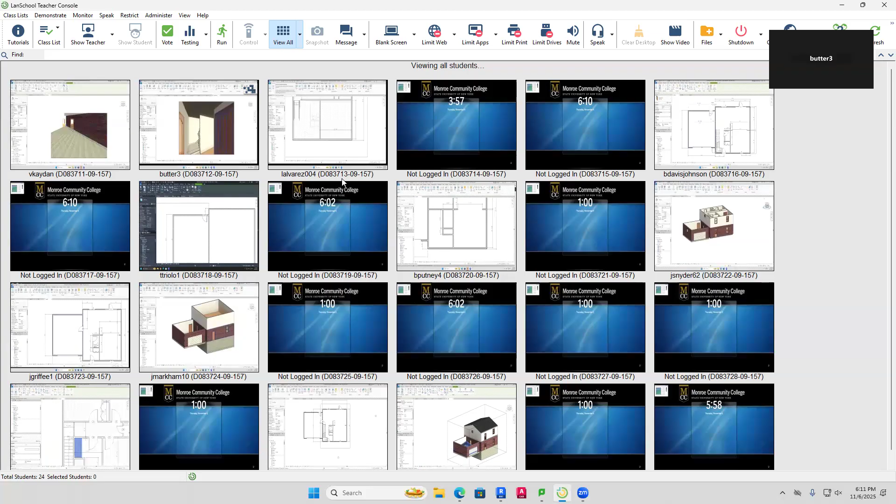As you're going through here, I don't just want you to fortunately follow along blindly—I want you to understand the process of where we're going with this. So I'm going to take over your screens, be as brief as I can, but explain a few concepts. Just hang on a second, let me lower the lights and show you a few things, then we can move on.

Taking over—can you guys see my screen now? This right here is the final 3D model. This is where we left off last week, and taking a look at this, we now have a number of things in place.

We covered how to do the basement walls last week, so you should have those all in place. Now you'll notice underneath here I put in my interior walls, but one thing I don't have is this information right here.

If you take a look at it, that's the wall foundation bearing footing. That is what would go underneath when it's excavated, as I showed you in the pictures earlier—you always have to have something down at the bottom here. That's the excavation footing.

Now, to get this, you go to Structure, then go to Wall. This is the only time we're going to use the Structure tab, so I'm going to go here—and let me turn this on real quickly so you guys can see a little better.

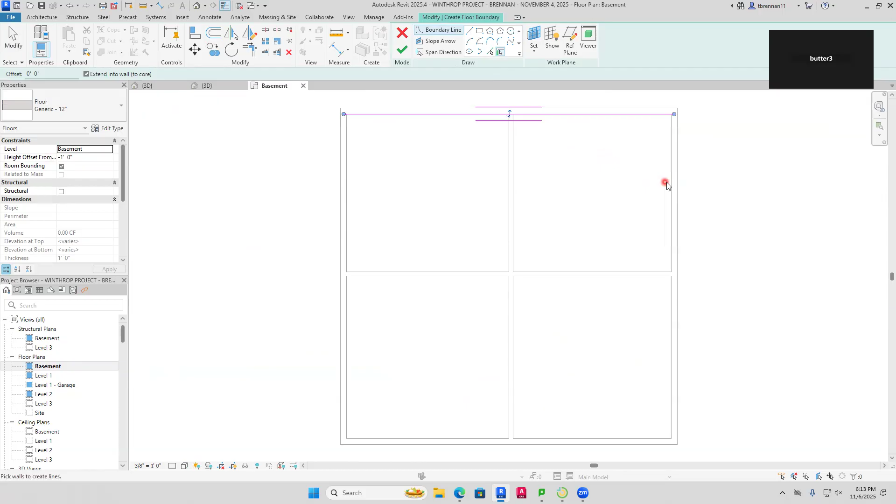And then at that point, what I could do is use my wall lines here. So I can just click on the interior of the wall lines here, and as I do that, it's going to give me this information. I hit the green check mark, and now I have that in place.

So if I go ahead and take a look at this again in 3D, I now have this. So that's there. And that actually needs to be brought up a little bit - yeah, there's a problem in this where this got saved with -1 foot. It should be 0, and we're good to go there.

Okay, so we have that. And you're going to see a little bit of a seam here. That's okay, and that is how that looks. So that is what you want to do for the basement.

Now, the basement plan, the rest of it has these right in here. And then the other thing I didn't do yet is I didn't bring my stairs down into the basement, so let me review again how we do that.

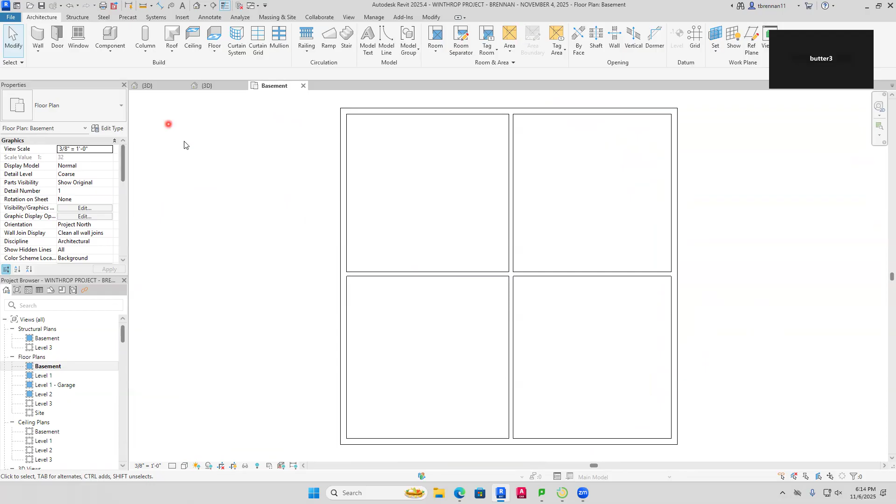So over here, I'm going to go back to my 3D view here. And what I want to do is I've already got my stairs going from the first floor to the second floor, they're right there, but I need to actually have them go from the basement all the way up. So I'm going to go to level 1 right here, and level 1 is right here.

And then remember, if you're going to put in your stairs, you always have to use a section. Now, at this point, I have a section that's actually right here, so I've already put it in here. You know how to do that - we've talked about this, this is your section tool. If you don't know, you go to F1, that's your help, it'll tell you how to do it.

But I'm going to go ahead and unhide this, unhide in view. And then I'm going to try that again - unhide in view this category. And so now I'm going to see this. I go over to here and I'm going to double click on this, and this is what it looks like.

Now here's my stairs, okay. Now the stairs, I want them to go down into the basement. So I click on this and remember what we talked about before, I go to select levels here. And the level that I want to go down to is the basement. So I click there and then I hit the green check mark, so it goes in place just like that.

So now I've got the stairs going from the basement up to the first floor and from the first floor to the second floor, and they're all connected. They kind of see each other as one. So that is what we've got in place right there, and we are good to go.

Now, to see this in a little different way, you could go ahead and do your live section, but that's pretty much what we want it to be right here. And if you want to see this a little bit better, you can change this right here to wireframe. And if you go to wireframe, you can actually see how the stairs are right here, how they're situated, just to verify they're going in from level to level, and they are.

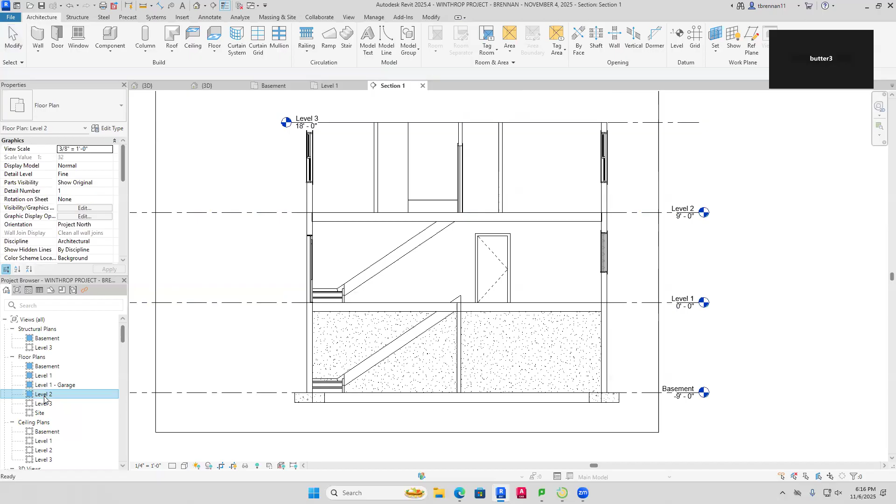I want to go to level 2 because that's where my shaft needs to go. So I'm right here, and here's my stairs. What I need to do is put in a shaft. The shaft will go from here down to the first floor of the basement. So that's what I'm going to do right now.

So I'm going to create a shaft. To do this, I go right here. Actually, you know what, I'm going to start it on the basement and go up. So I'll go to the basement, and run this shaft all the way up to the second floor. So I'll go to shaft.

Shaft is located right here. So go to shaft opening, and then it says -1 foot, which I don't need because right now I just want it to sit right on top. So I'm going to make that 0, and this is going up to level 2.

Once I have that, I have to create the actual opening. So I'll go to rectangle. I'm going to make the opening starting from right here, and bring it down right to around roughly this position. I'll go right to here. That's good. And then I'll hit the green check mark, and it gives me that.

Now let's see what that looks like. If I go over here to my level 2, is that the right level 2? Yeah, that should be the right level 2. So we're looking good there.

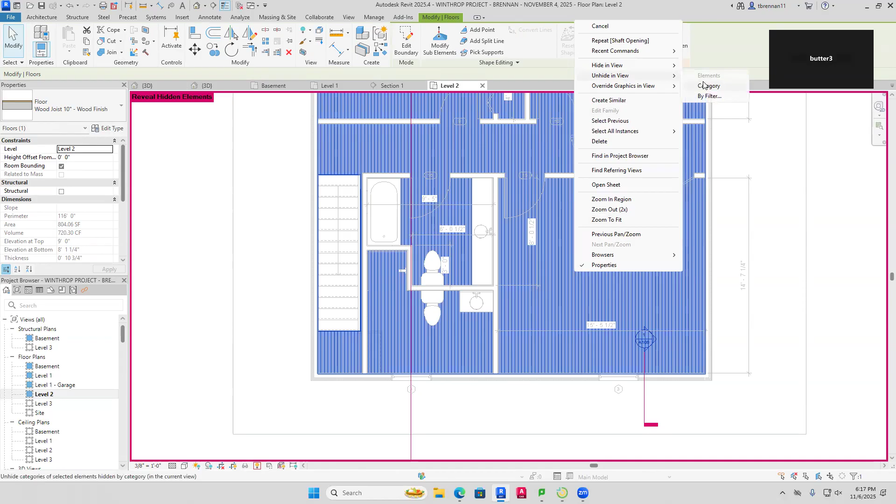Let me go ahead and bring my floor back, I've got it hidden. So let me unhide my floor - unhide in view that category. At this point, I'm going to take a look at it. Now you can see right here, there's your shaft. The shaft is right there. You can see it coming through the floor.

Now I can go to level 1, and I'll look at the same thing over here and do the same. I'll turn on my floor - again, this is a lot of visibility stuff we've learned about before, but we're just getting good at it. If I click on this right here, there is my shaft going up right there. It's coming up from the basement, then going up, so we're good to go there.

Okay, so that is what we have. Now, to see this in all its glory, I'm going to go to my 3D view here. What I'm going to do, just to verify this is what I want it to be, is go here and put in a section box. So the section box, I go to here.

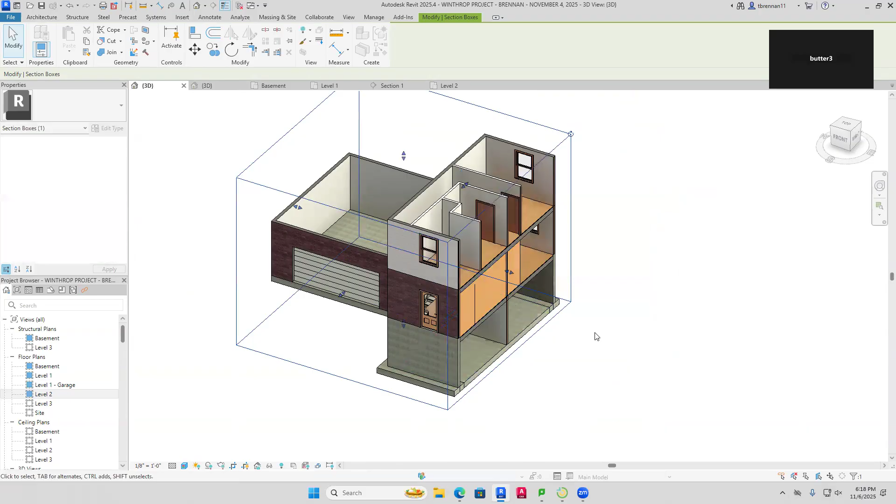I click on this, and then I'm going to take this and pull it in a little bit so I can see those stairwells. Now I've got this one here, and I'm going to push this back just a little bit further so I can go past there. Take a look at there, and there they are. Pull it out just a little bit so I see half. There we go. So there they are.

I've actually got my holes in the floor, and they go right up through there. So you want to check it and verify that it is in proper place just like that. And if I were to pull this out a little bit further, I'd be able to see that, yes, I've got this. I got to keep that like that though. So we go like that, and that is what that looks like.

Okay, so that is how the stairs go in. That is how the actual footings go in for the basement, and that is how you'd make a shaft. So those are all things you're going to want to be aware of as you're going forward. I'm going to turn off my section box. Any questions just yet? This is all review right now.

Now, the other thing I want to show you, and this is where it gets a little bit dicey here, is right now we've talked about ceilings.

Now, I don't think I have my ceilings just yet. Let me put a little bit of detail on here. No, I don't think I have my ceilings.

So let me go ahead and pull up my final version because this one's kind of interesting. I want you to see how this works. I'm going to go ahead and go to one of the sections here, and I want you to see that. So I'm going to go to section one. Okay, and I've got this here.

Now, taking a look at this right here, you've got this. Now, this right here is right there. That's my ceiling. Now, notice what the ceiling is. The ceiling is over here. It tells me it's compound ceiling, GWB. GWB stands for gypsum wallboard. Again, if I take a look at what it is, it's 5/8 of an inch thick. So it's just a standard sheet of drywall, and it's sitting right up there.

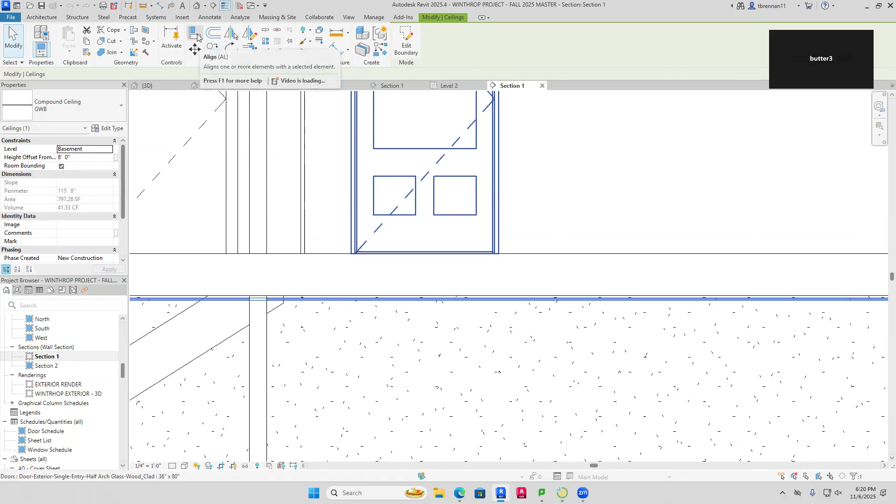Now, going over to here, what I want this to do is I want this to actually touch the bottom of this. Easiest way to do it is use the align command. Align command is right here. Now watch the little video. The video shows you how to align items, and this can be from a plan view or it can be from an elevation view.

So you can go ahead and align things just like that. So I'm going to use align. I want to align to the bottom of this, and I want to align this. When I do that, boom, you see that? It just jumped up, and now that thing's right there. And if I click on this, it tells me that the actual offset is 8 feet and 5/8 of an inch.

That's the proper distance, 8 feet 5/8. That's what's going to attach to the bottom joist there. Now I'm going to do the same thing here. I got another one here. Now this one already is. This one I think is also 8 feet. Yeah, it's also 8 feet 5/8. So that's what those are going to be.

And then the top ceiling right here, did I put one in there yet? Yeah, I did. And this one needs to be 8 feet 5/8 as well. So I'll go ahead and do the same thing. I'll make that 8 feet 0 and 5/8, just like that. And I go ahead and do that. And that is now properly in place just like that.

And that would actually go underneath the trusses right here and so forth, right? They don't show up in this view, but that's what they would do. So that is how we would put those in. So that's how the ceilings go in. So again, when you're putting in your ceilings, they will go in on your ceiling level.

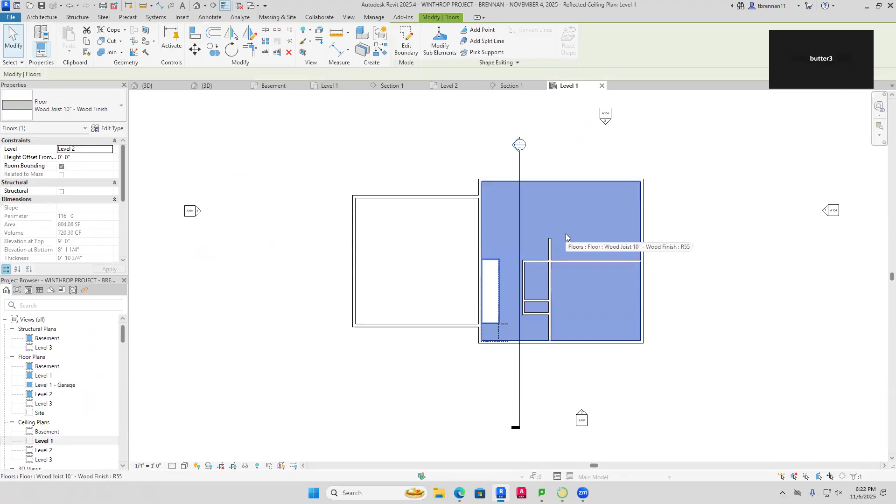So let me just go ahead and show you how that works. I'm going to go to my ceiling view here. So I've got that done. I got my ceiling plans here, level 1 ceiling plans, and this looks like this. Now this right here, that's a floor, and I'm not worried about that. But what I want to do is I want to put in a ceiling. So I'll go to ceiling here, and I'm going to go ahead and sketch a ceiling using the inside of my walls here.

Like that. So I do that, and this needs to be 8 feet space 0 and 5/8 inches. Okay, that is the proper dimension. So 8 feet and 5/8. Hit my green check mark, and then that shows up right there.

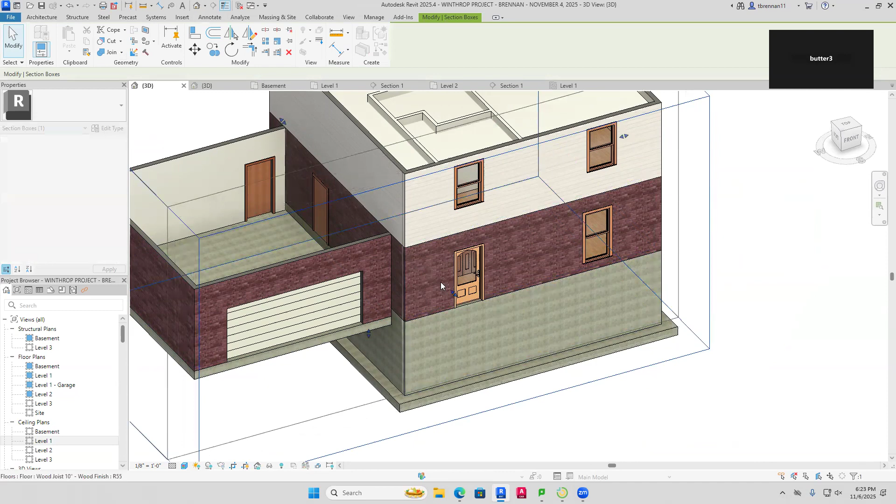So then if I take a look over here at my 3D view and see, I'll go ahead and put this back just to show that that did show up. And I'll put my section box on. So I go to the section box. We should now see the ceiling in place as we discussed. So I click on this and I'm going to push this back. All right, and then I'm going to go ahead and go to this view front.

Okay, and let's see here. Where is that? Okay, am I seeing that? No. Let's see here. Where is it? All right.

Okay, so that's good for level 2, that's 8 foot 5/8. It looks like this actually needs to go on level 1 - I had it on the wrong one. So we'll apply that so it's where it's supposed to be.

Now if I go to my front view right here, that's my ceiling right there, and you can see it's right on the face of this. So it's right there, and that's how you'd want to do that - it fits right up on there.

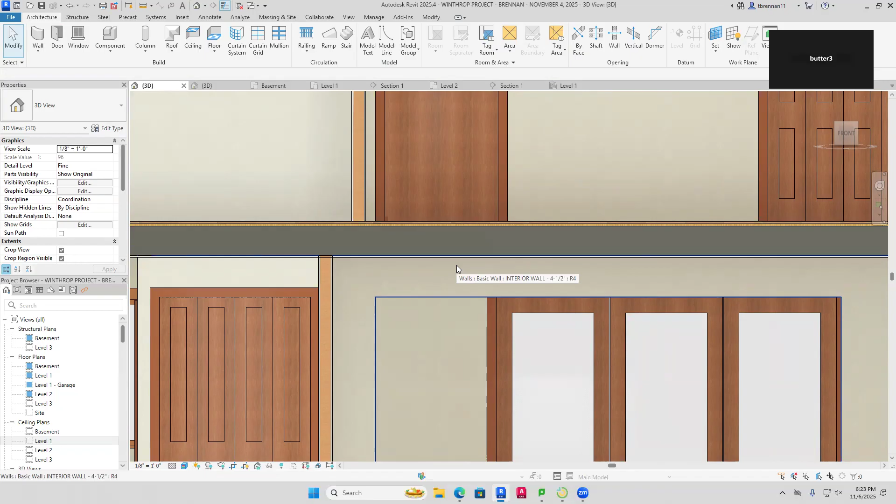Then you can either use 8 feet and 5/8 of an inch, or you can use your align tool. Both of them will have the same result. So that's what that should look like when you're done with it.

So that's how your first floor, second floor, and basement should all have the ceiling in place. And the actual height of the walls - I want to get into this too, because this is an important concept.

Let's go to this one here - actual height of the walls. This should actually go up to... yeah, this one goes up to level 1, which isn't really what I want. Let me try this instead. Yeah, the top constraint - this is unconnected, and the unconnected height is 8 feet 11 and a quarter right there. This one over here is also up to level 1, which I don't think is right.

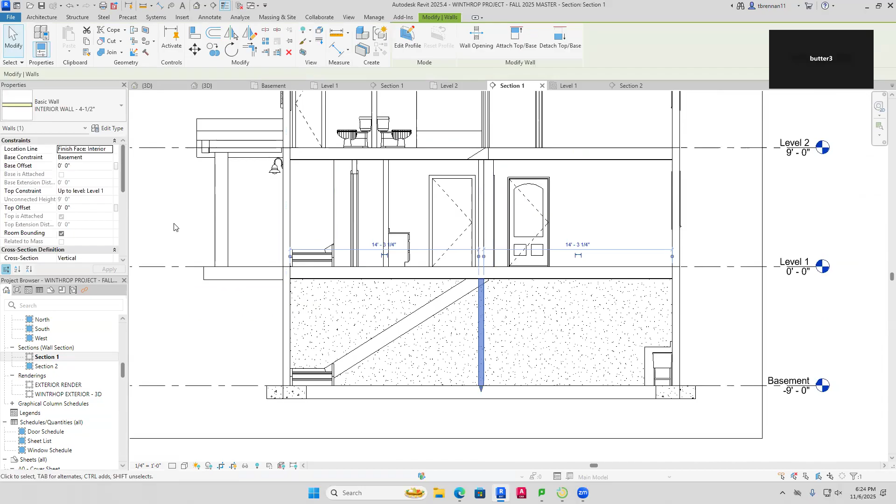So one thing you have to do as you're working with this is make sure your walls are not projecting through the floor. That can be a little bit strange, but I'll show you what I mean. If I go here and take a look, one of the things you'll see is when we do this, your walls may actually project through. It looks like we're okay here though - I'm not seeing any walls poking through. So I guess we're okay.

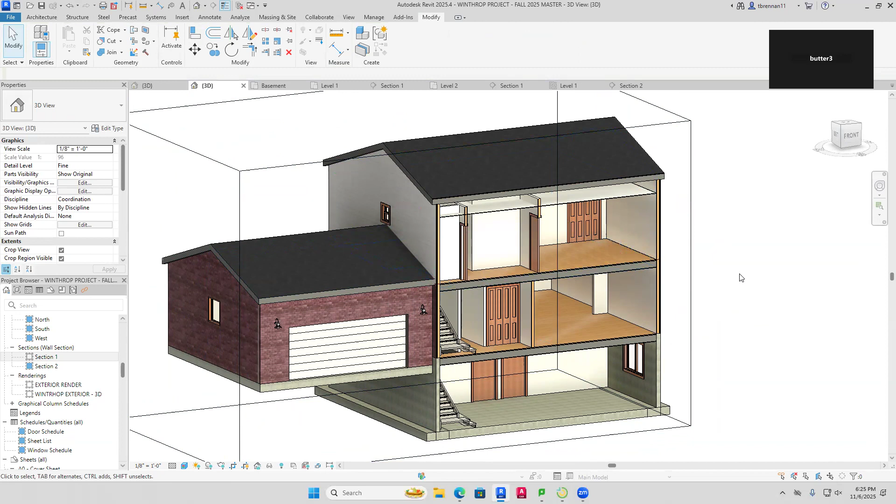So the heights of these walls right here just have to be down below the first floor, so roughly 9 feet should be okay - unconnected 9 feet should be okay, and that'll bring it up to the stud underneath. So that's how those would work - those are all things you'd want to put together as you're putting this together.

Now the other thing we have here, you guys already know how to do, is the roof. Over here, if I go to this view right here, and if you want to put the roof on, this is what you do. We've talked about this before - I would go ahead and this would be level 3. So level 3, when you're going to put the roof on, you'd go to roof, and the question came up a few times: what do I want to do as far as the actual slope of the roof?

For the slope of the roof, I'm going to go to define slope here, and it's actually going to be 4:12. I'll start by touching this right here and touching this right here - so those are both going to have slopes right there. The other sides will not, so I'll go to this - this does not define a slope, and this does not define a slope either. That is what we have there - the actual roof is going to be 4:12 like that, so it's a 4:12 roof pitch.

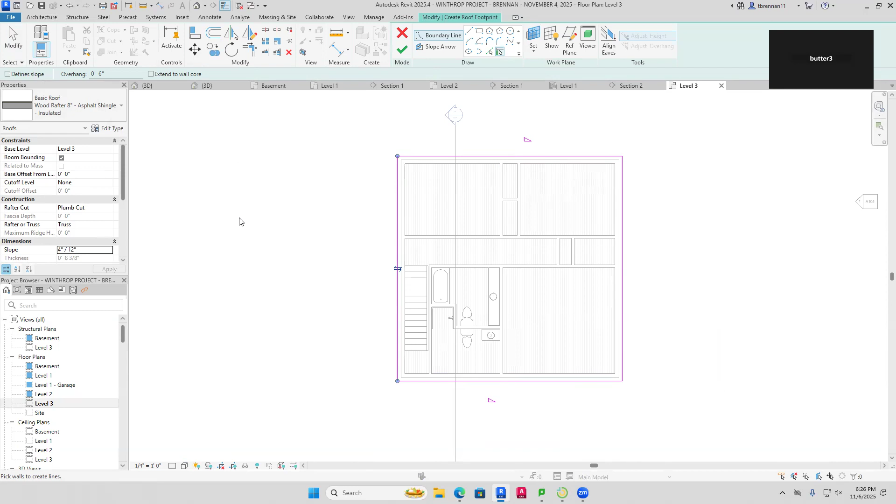I'll go ahead and attach. When I do that and take a look at it in 3D, that gives you this kind of view. To attach it, you click on the wall, go to attach top or base, click here, and that brings it right up there. Then I do the same thing here - you select the wall, this shows up, attach top or base, and you click that and it does that.

Then this wall - see this little notch right here? That needs to go up there too, so I have to make sure I select that, do the same thing, and make that attach. Then I do it right here as well. So that's just a little detail thing you want to make sure of so your roof is consistent all the way around - that's how you do that.

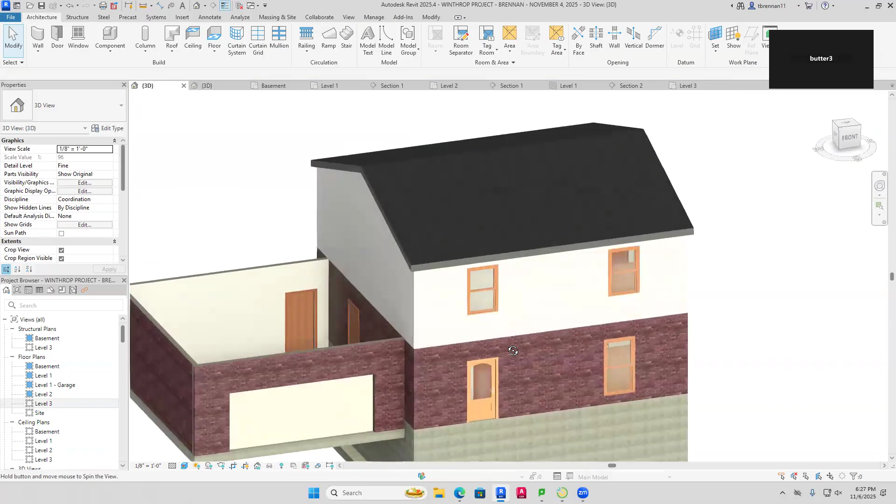It's the same - you do the same thing over here on this roof right here. Now this one is going to be a little bit fussier because that's going to be level 2, and for level 2 I want to see the garage. Let's go to level 1 garage.

Okay, yeah, I'm going to go ahead and use this view. It's going to ask me to put it in the right position, so I'll do that. Go to roof again, and I'll do the same thing I did before using define slope. I'm going to touch this right here, and touch this here, and then uncheck define slope like this.

Now for this one, what I have to do is just draw a line. I'm going to draw a line right from this outside here over to there. That's what you need for that. Hit your green check mark. Okay, continue. Where do I have an intersection?

Okay, let's find out. Oh, right there. Yep, see that? So you've got to zoom in and make sure you don't have these overlap conditions, and then go to green check mark.

All right, now at that point, this may be on the ground. We'll find out, and it is. So just go ahead and take it, and you adjust to the proper level, level two, and there you go. And this has to be 412 as well, so we'll go here and make that 412. And then I'm going to go ahead and take all these walls and attach them to the top, just like that, and we're good to go. And that is how we get that going.

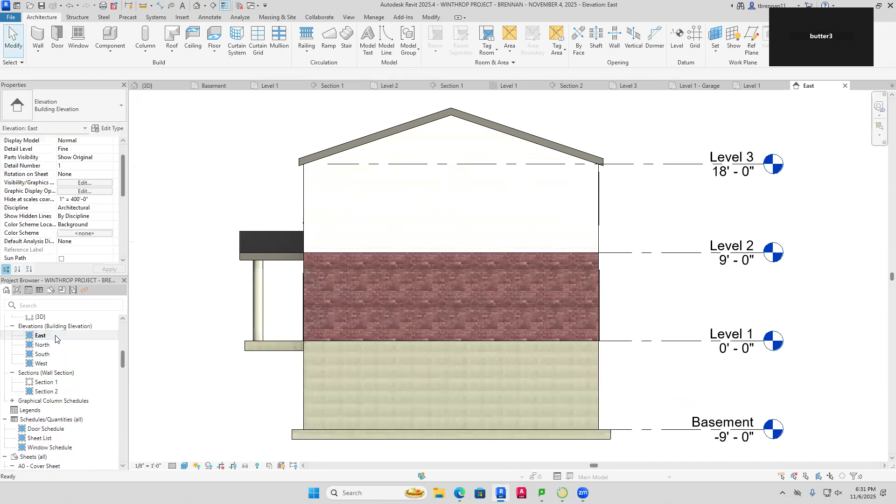So I'm going to take a look at it from the side and see how I'm doing there. I'm going to take a look at one of my elevations. The elevation I'm going to look at is going to be east, just to see how it looks. So I'll go to east, and how we do, that looks pretty good. I'm going to go to west, make sure everything's looking okay.

That looks good too. I'll go to north—actually south. South, okay, so south looks good. Needs to go over just a hair, you can see it's not quite centered. So I'm just going to use my arrow keys, and that's just about perfect right there.

So it was almost perfect to start, I just had to nudge it over a little bit. So then when I take a look at it in 3D, you're going to have that in place. Okay, so that's a huge part of what we're doing right here. So we've got all that.

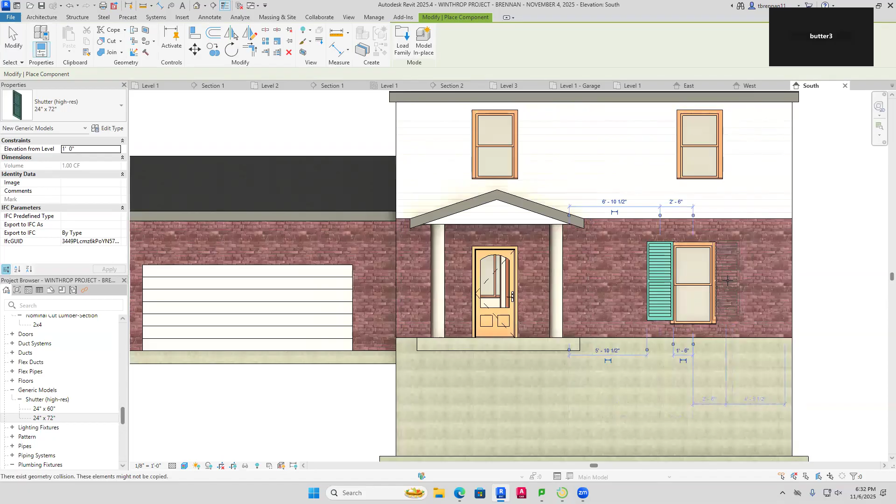The other thing I was going to mention here is if we go back to the south view right here, the south elevation here. Now I have some other items here, and one of them is shutters. So on the first floor, I've got this 24 by 72 inch shutter, and this comes in, and you can use whatever tools to align these that you want to. If you have the brick on, it might be kind of hard, but I'm just going to go ahead and drop those there. I'll reposition them later.

Then I have these as well, and these go up here. I'm going to drop these there, and this goes over here. Well, need one here too. And then I'm going to just adjust them later. But for right now, I'm just dropping them just to get them in place.

Now, at this point, most of your elements are here. There's one more other item I want to show you, and that is your lights. There's actually lighting fixtures here, and I'm going to grab these. I got this wall lamp, this bracket, and I'll drop one here, and then one goes here, and one goes here. And then I actually have a couple over the porch as well, so one goes here, and one goes here.

And then if I were to go to the other elevation, which is the north elevation, I would do the same thing. So the north elevation has these over here, and I want to place these here. And I think what I did for you guys is I had those showing up all the way around as well. And I'm almost done. You guys can start working. I know you're eager.

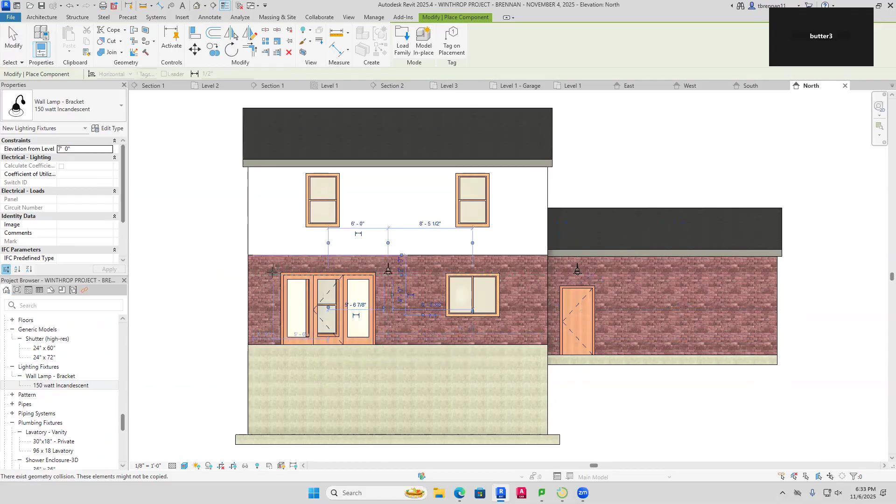Yeah, okay, so I've got those two there, and I've got just one. Okay, so I've got one that's right here. So I'm going to go over here to my lighting fixture here, and this one's going to go here. And this one goes right up there like this. And then I got one over here and one over here like this. Okay, now those are some of the details right here.

Up here, you can put shutters on the back if you want to, not required. There's also a garage. There's a window that goes up here and a window that goes on the garage door, so make sure you include those.

But that's where I wanted to get us tonight. The remainder is going to be doing the wall section. We talked about how to do a wall section before. So in this one, what I would do is to make a wall section, I would go to level one. And with level one, I would go ahead and double click there. And that gives me this section, which is not really the one I want.

So the completed version, which is this one here, I'm going to show you how that looks, just so you guys can work on this one. So on level one, when you're ready to make the section, you're going to go here to level one. And the section marker, I'll just go ahead and show you where it is. It looks like this right here.

And so I've got this, is that the right? No, this is the one you want. I'm sorry, this one right here. So you want to put a section marker. This is a wall section. Notice that up here, it says it's a wall section right up here. So this one, you'll notice it's taking a look at a smaller portion.

So what I want to do with that is I want to make this visible. So I'll click on this and unhide it, and view the category. And then I'm going to go to here and I see this. And now if I double click on the head of this, that's what you want to see.

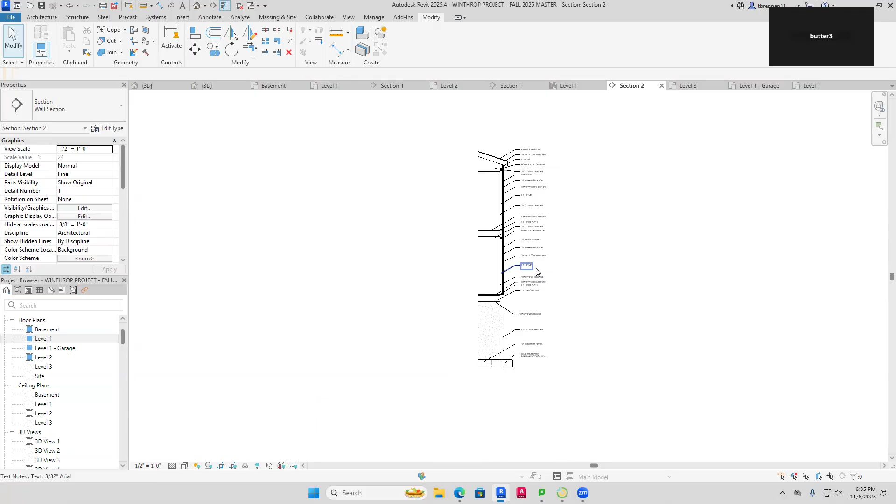Now, once you see this section, all of these details are what you're going to put in. You guys have done this before. And once you've done all that, all this just comes right off the sheet. You use that right there. Then at that point, the very last thing is all these go onto the sheets, okay? And so your cover sheet looks like this. This is actually something you're going to make a new rendering and put that on there.

You got the first floor, which is here. Now you'll notice that everything here is a little bit jumbled, and the reason why is I turned some information off.

If I go to my level one, just to get it ready, you always want to make sure you go here, because whatever it looks like here is what it looks like. So I'm going to go here, crop it. See this right here? I've got this crop region, I can just change that. So I crop it, and then I'm going to hide these again.

Once I have that in place, then I can actually hide my crop region too. So it looks like this. And then when I go to my sheet, it looks like that, and that is what you want.

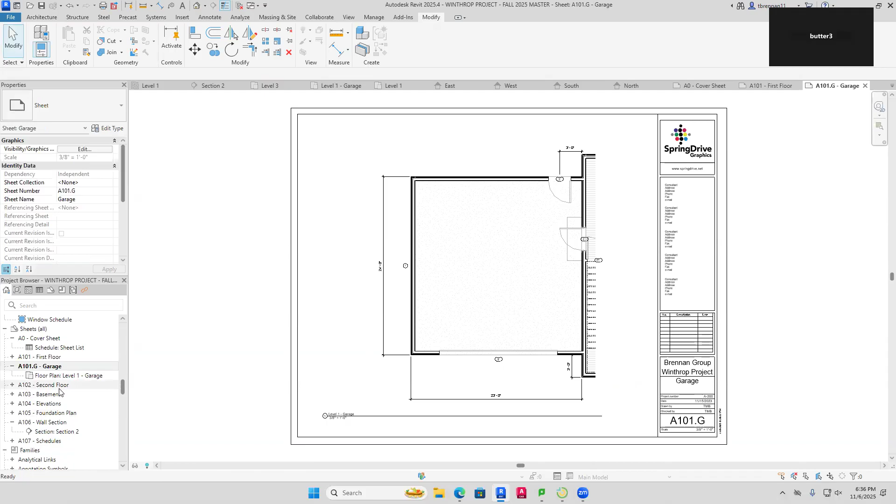You want to include the same dimensions that I have in my final, and that is the same thing you're going to be doing. You guys are pretty good with this, I don't think this will present too much trouble. But then you've got your garage plan, same kind of a thing. The second floor, and same thing, basement.

This is the master, so I'm just going through these right now, and this is what you go ahead and put together here. So that is where we're going. The final instruction sheet is actually on Brightspace, just to show you where that's at real quickly, and we will take a look at that to make sure we're all on the same page. So the requirements are to go ahead and use the construction documents to create this.

And we'll go here, and going to go out to here. And this is the Winthrop project. We'll go here, and the Winthrop project looks like this.

Let's see here, I think I have the construction documents. Okay, you know what? I don't think I have a description. No, I don't. What I do have here, yeah, you're not going to put this in, you're not going to submit it tonight. We're going to wait till next week because I got some other things I got to make sure we're all done with.

So I'll tell you what, that's what we have right there. You have one more class, we're going to have next Thursday to work on this. So let's work on this right now, take it as far forward as you can tonight. I don't think anyone's going to quite finish, you're going to come close, and then next week we'll do the final touches because I want to do one more thing.

If you recall, I'd mentioned that we're going to have the print shop actually take your sheets and get them printed up at 24 by 36, which means you're going to be able to walk out of here with a roll of plans. It'll look pretty good, and you'll be able to say, I generated these in Revit, so I know how to do this much. That is your calling card. That's what I'm going to have them do for you.

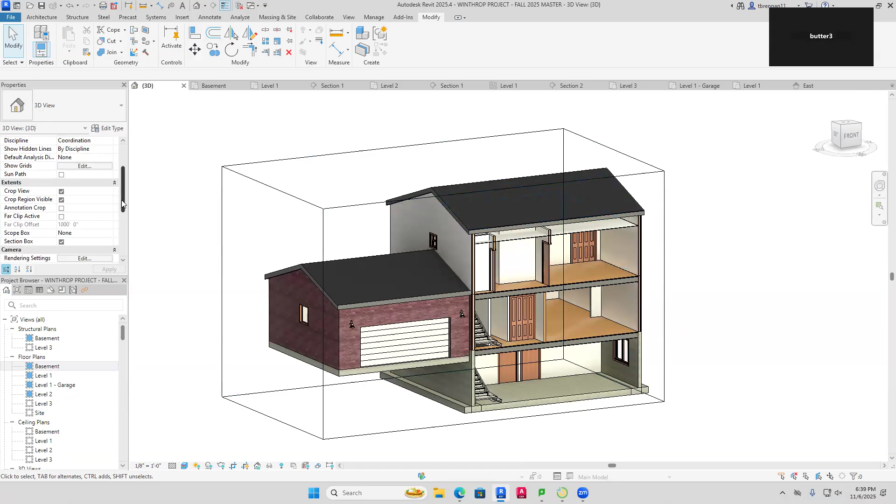So when you're done, it's going to be a smooth face between the two items. Let me go ahead and turn this off. Do this, and so you see how it's smooth all the way up? That's what you want to do. So this is going to stop right there, this one starts, and the second floor stops here. It goes right up like that.

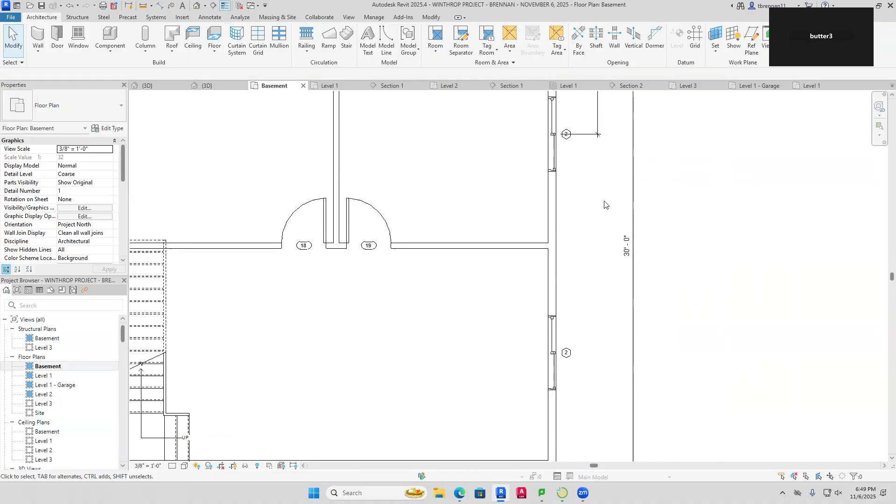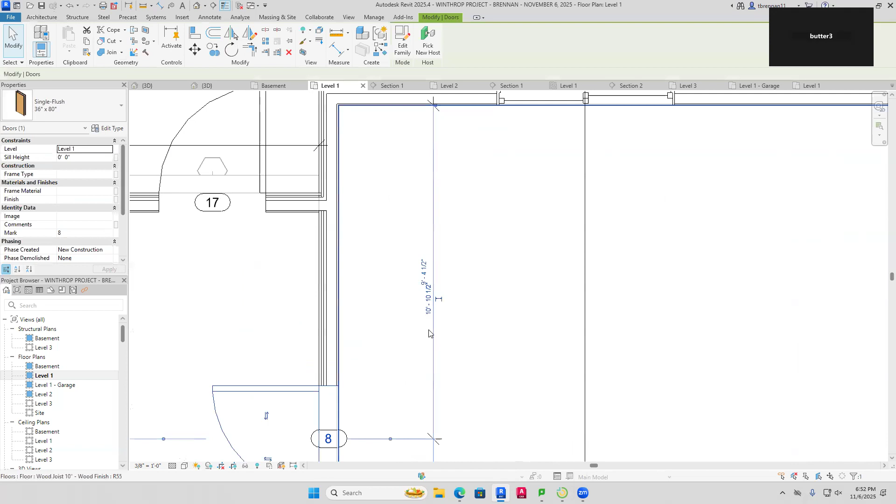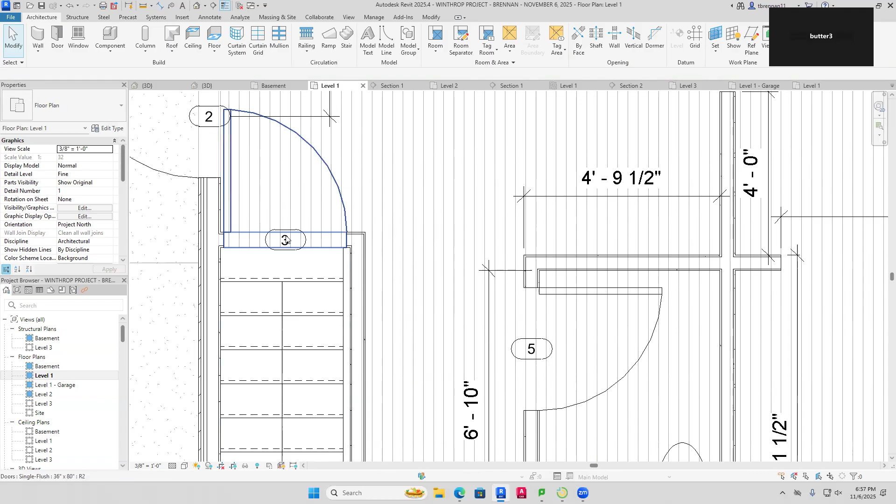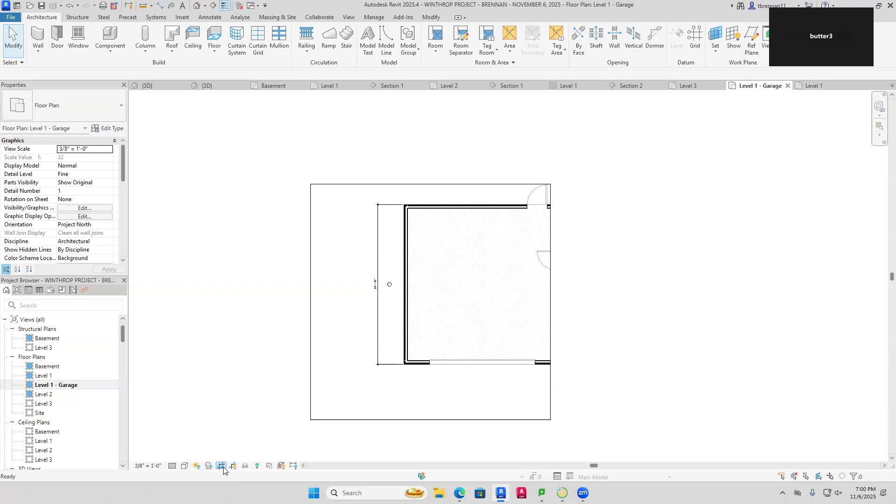Hmm. Oh, okay. Hmm. Yeah. Interesting.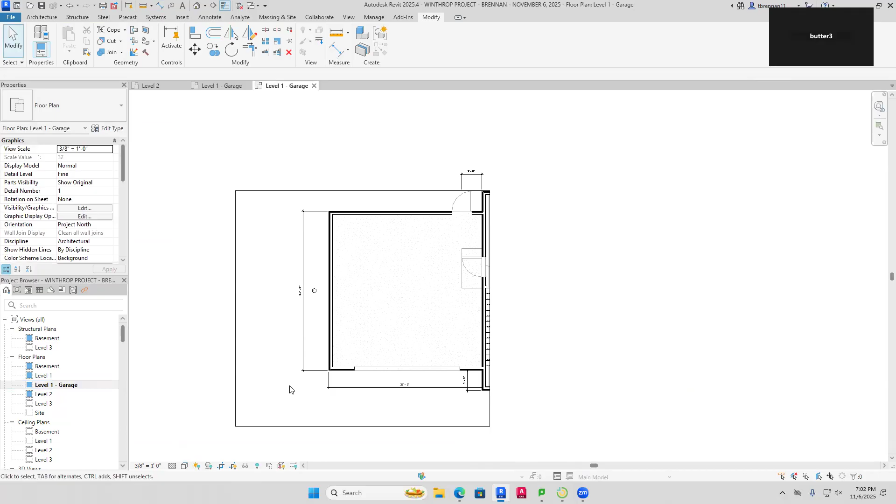Do any other windows besides the front ones have shutters? That's it, you could put them on if you'd like to. I just didn't—in the house I built, I couldn't afford them. So if you want to put them on, you can. It's your call.

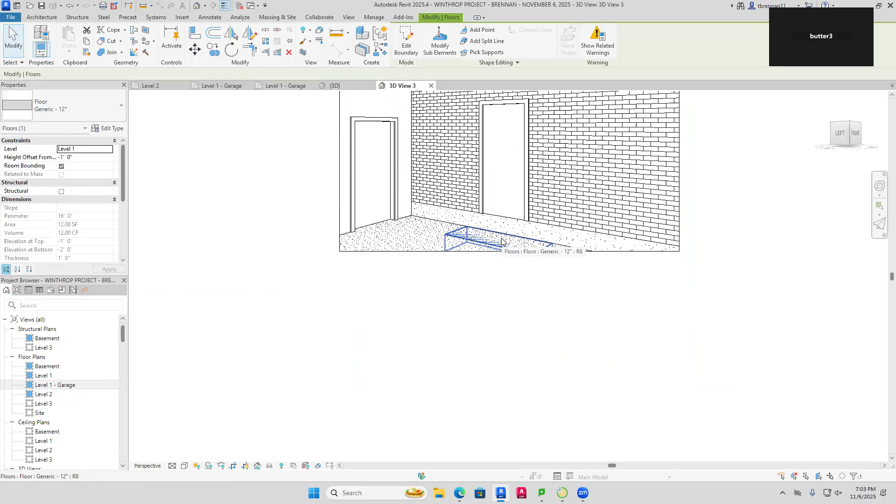I'm not expecting anyone to get this done tonight. The things I showed you are what I'm looking for you guys to get completed tonight. When you feel good about that, just go ahead and take off. But the next thing we're gonna have to work on is making sure our sheets are all together, getting them ready for printing and that kind of thing.

So take it as far as getting the basement in, the structural wall, the structural footings and so forth. You want to get those in place. You want to get your shutters on and so forth. Just start to tune it up now. Get your ceilings in, make sure those are in. Do a few camera shots and make sure it's looking good.

And then we'll continue on.

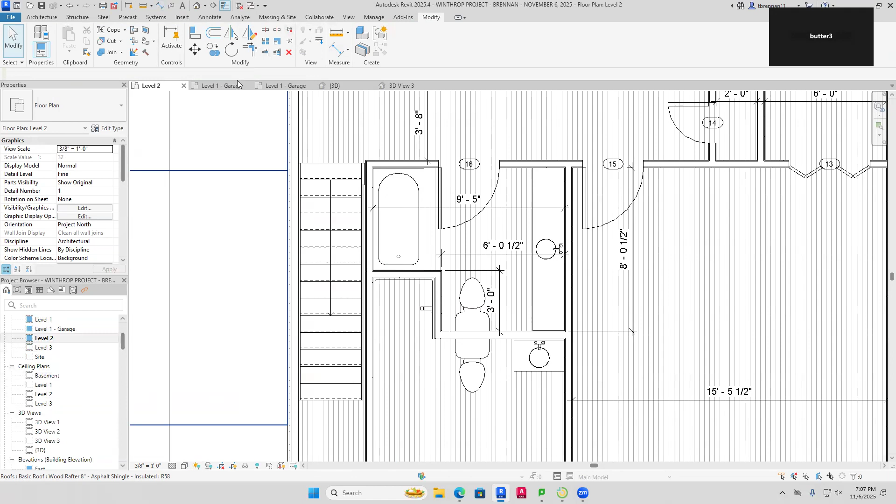Yeah, okay, let me show you what those are for the section. Here we go, let me bring that up. And yeah, I think they've got to be the smaller version. Yeah, it's actually right here. Okay, so these right here, they are actually 3/32nd Arial.

Okay, see that? Is there any way to default the font, or do you just have to change it each time?

Well, yeah, you can. Here's what you do—when you put in one of these, if I were to put one in, you go to annotate, and right here you just go ahead and change it right now to 3/32nd, and then you're good to go. So if I were to go ahead and place it right here, put this in and put it over here, I've got that right there.

Okay, so let me put in a note, and I'll just go ahead and say 'note' in caps. All right, and so once I've done that, if I go to put in another one, it's still 3/32. See that? Yeah, all right.

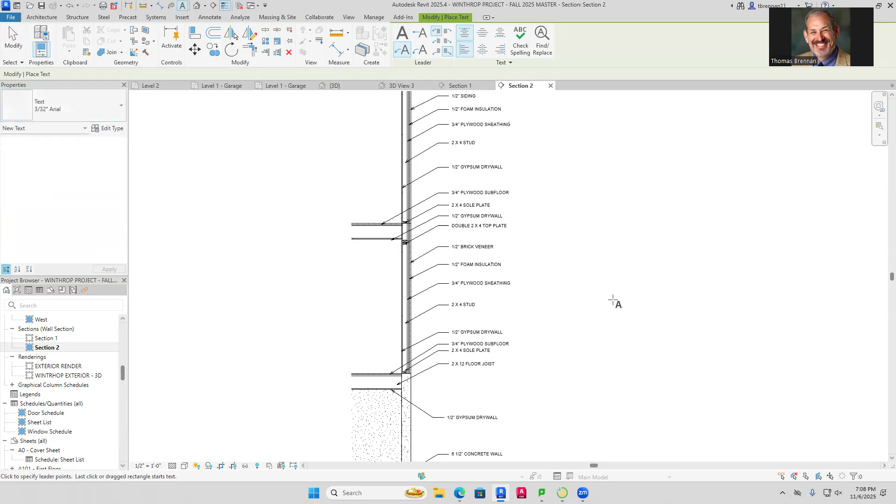So it will be stubborn—it'll stay there once you've adjusted it. However, if you started with a different one, then it's going to keep on doing that until you change it. All right, okay, yep, all right, good question.

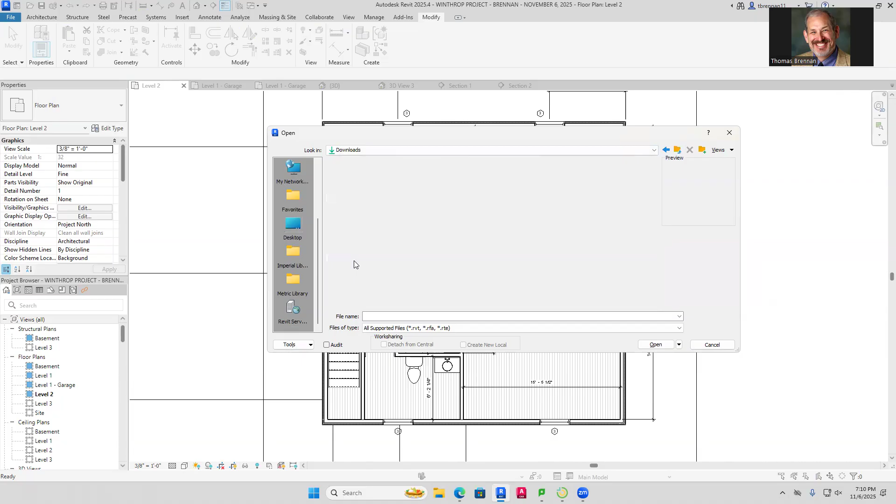There we go, no it's okay. Okay, so here we go, stair practice.

So if I'm here in stair practice, just to show you how this works, I'm going to start on the first floor, level one, and hide this. First of all, your stairs are already set up to do what they're supposed to do. I'm going to go here to stair, and this is all set up. Yours are set up to go left, right, left, they're left justified. So this is how you'd make it.

You'd go here and pick a point roughly right around here, click your point, and start to go in this direction, up, so you see two risers. Then go over here and touch the wall right here because it has to come right there. Then go straight up like this. When you do that, hit the green check mark and it's gonna go right in place. Then you can adjust it as you need to.

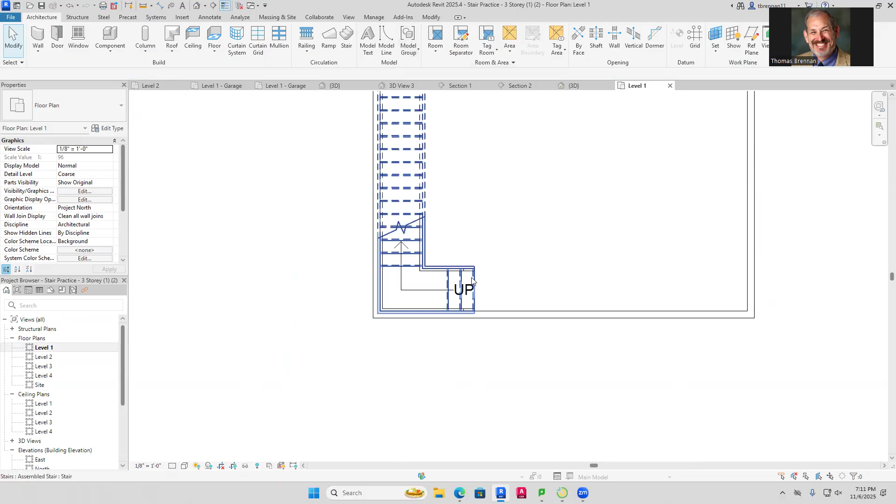If you decide it's not quite how you want it, you can go to edit stairs and click on this, use your arrow keys to kind of move it over like this. See that? So go and give it a shot. I think that's really it.

It's really quite straightforward. The biggest key is you go here, go to stair. It's left justified already, so you just pick a point roughly here, go over two risers, click, line it up right like this, click again, and go right like that.

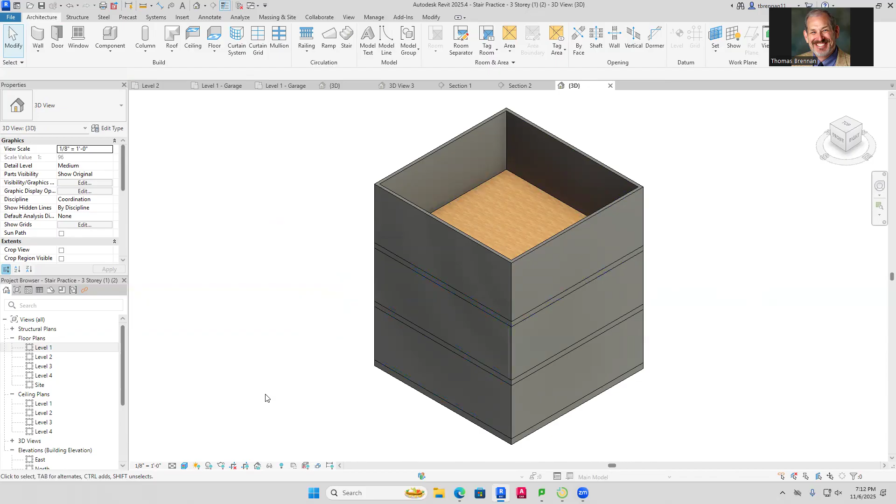Okay, good. Thank you. All right, sure.

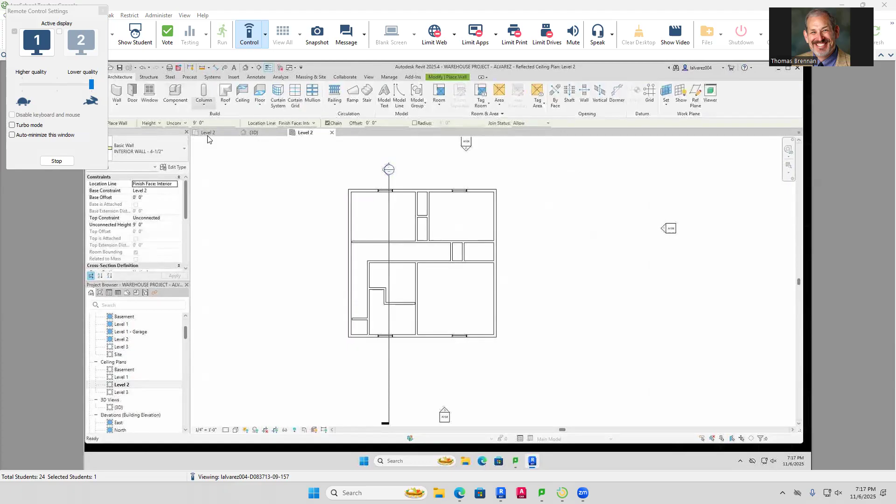Okay, now try it again and let me watch you. So go to ceiling. Right? Yeah, sorry. Okay, then change the height offset from level, go ahead and type in 8 feet space 0.5. Okay, then 5/8. Yep. Okay, good, now use it.

It says go to sketch ceiling now at the top right, and you're going to click on the inside of the wall. Go to, I'm sorry, hit your escape key, go to your pick walls. Pick walls is at the bottom of your tools at the top, it looks like walls with a little arrow on it, on the top of your screen.

Let me show you what we're talking about, let me take over control quickly here. It's right here. Okay, then you go the inside walls here. Let's see how we go here. Once we have those, we are right now on level 2, that should be good, and we'll hit the green check mark. And there you have it.

So then we got that now, and you want to just verify that it's there. If I were to go here and take a look, let's see if it indeed is there. I'll take a look and see if there's a ceiling here. I think that there is. Looks promising, although I don't know.

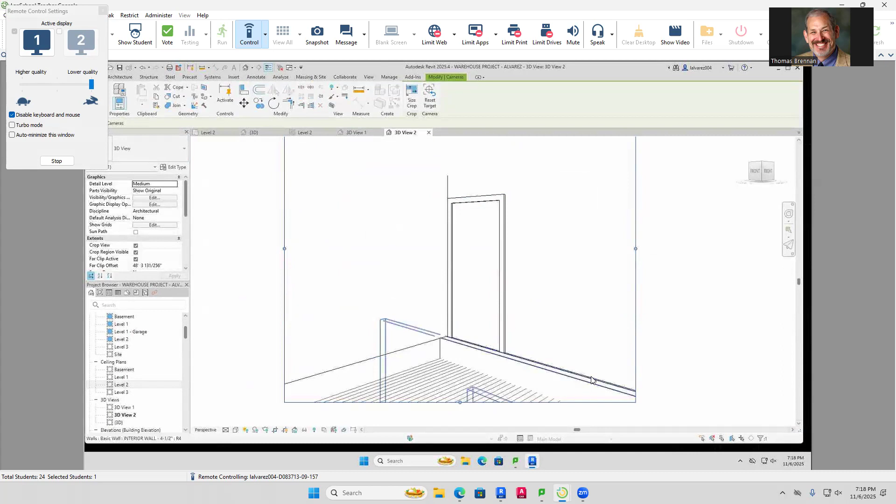Okay, we're on the ceiling plan, that's why. Okay, so I'll go to level 2, and let's go ahead, we'll put in a new camera here. So I'll go to camera, and I'll go here, and I want to just go ahead and see what this looks like. And there we have it. And there should be... okay, looks like we don't have, where's that, the floor, okay, floor needs to be at 0. That's all that is, and there's that.

And then let's see if we've got a ceiling in place. Okay, yeah, you do. And then I do the same thing for level number 1, right? Yeah, same exact thing. 8 feet, no inches, and 5/8, 8 feet and 5/8 is what you want. Okay, that's it. Yeah, looks good. Let me give you your control, your machine back. All right, there you go. Yep.

My roof does not want to go on my garage. I feel like I remember there's something. Let's take a look.

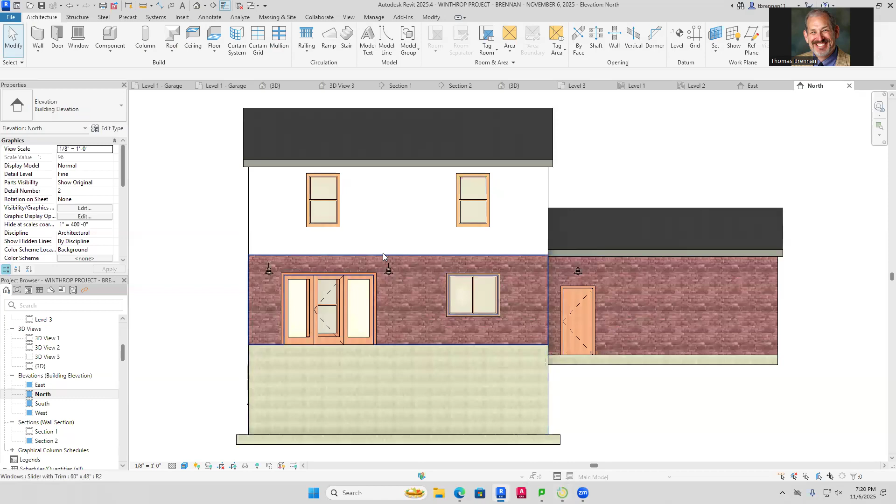All right, so we're here. Right now you're on level 1. Let's go ahead and go to your roof. First, go over to the left and make sure defined slope is good. Go ahead and touch the top wall of the garage.

You want it to go the other way, not inside. Click there, then go to the front of the garage and touch the wall there. Good. Now go over to the top left where it says defined slope and uncheck it.

Now grab the left. Go ahead and go to your tools. The tools are over to the right where you see the red X. Go a little further, there's the line tool over there. Keep going, you click on line.

Now you want to draw a line from that top purple line straight down. Click right there and just go straight down and connect it to the other one. Click there, hit your green check mark.

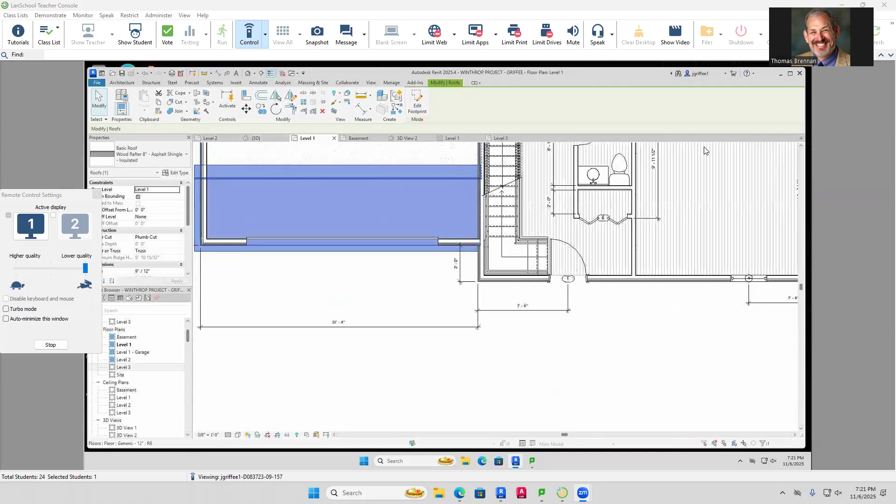Now take a look at it in 3D and let's see what we have. It might be on the first floor, that's fine, so go ahead and change it. See where it says on the property, it says it's on level 1. Change it to level 2. Hit the arrow and choose level 2. Perfect, it pops up. Then click on that again.

Click on the roof, then go to your roof pitch, your roof slope. It says 9 by 12. You want to make it 4 by 12. Just get rid of the 9 and put in a 4.

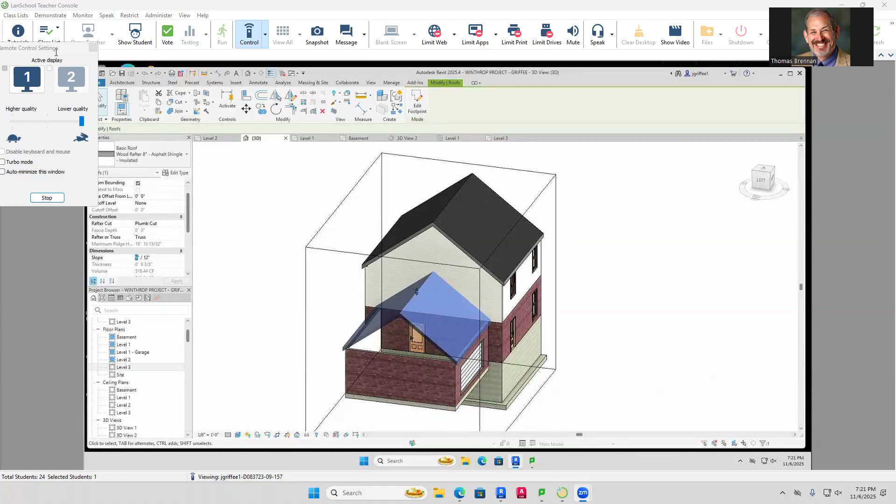You didn't put anything in, so it disappeared. You have to select it and change the number 9 to 4. Just get rid of the 9 and type in 4, yep, and hit apply. Good, repeat with the other roof.

Perfect. Now click on that roof there. Looks like you've got an issue going on right there. Not really sure why that's happening.

Let me take over for a second here. Let me take a look at mine real quickly, I want to make sure we've got this. So we got the 4 by 12, yeah we do, and level 3. Yeah, okay, we're good to go there.

Walls should be up to level 3. Okay, so let's go back to yours and take a look at that. Now, let me just do a little quick thing, let me take over for a second here. I'm going to go here, full control. All right, I've got this.

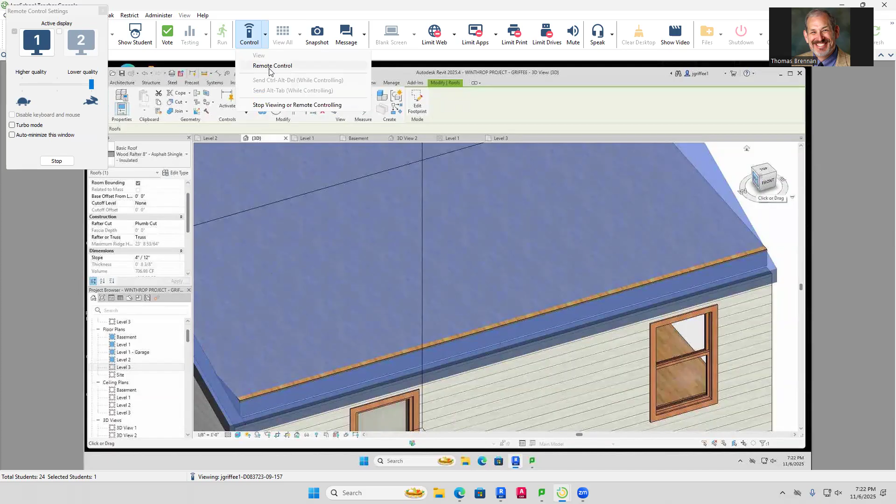What I want to do is attach top base. Now, what is this right here? Not sure what that is. Okay, that's a floor. Don't need that there. All right, and then that's good.

Over here, a little trick here: if I hit the tab key, I can go ahead and attach these to the roof like that. And that's good. This needs to come down because you see it's kind of floating. Yeah, so that's negative 1 foot.

The same also needs to happen. Go to the rear and make sure the door—you've got a door here, so you need a door on the back, and also there's a window on the side, and your basement has windows too. So those are all things to work on.

All right, thank you. Yeah, looking good though, you're making great progress, looking great.

I'm trying to put the wall foundation bearing footing, and it allowed me to do it once, and that was it. Yeah, it doesn't go on the first floor, it goes on the basement, so it doesn't go there. Okay, so just go ahead and Control Z to undo.

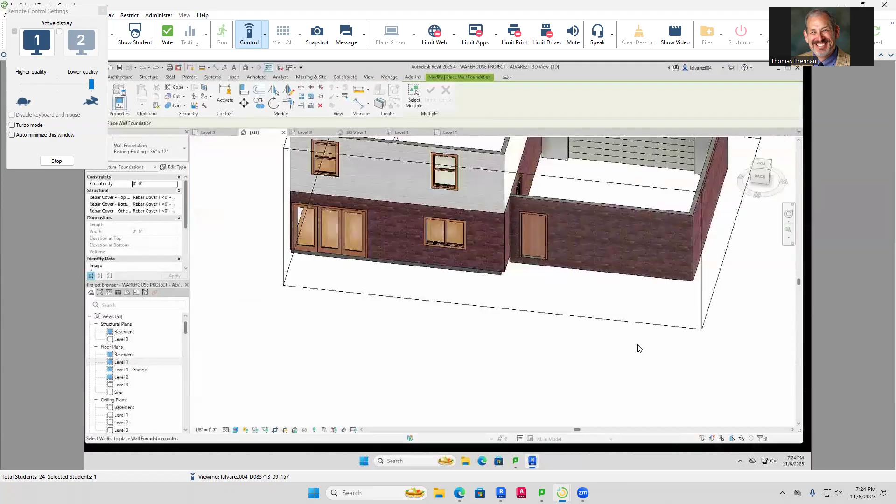Click on that floor—that's okay, go back in there and click on that floor because it's poking down, and yeah, don't. So Control Z, press your escape key to get out of the command. Now click on that floor that's poking down, click on it, then go over to the left. Oh, interesting, okay, that's fine. Let's do this, press your escape key.

Let's go to your basement because your basement walls are not in yet. Okay, so go to basement.

Okay, now you can't see anything, so you have to go and turn on your underlay. To turn on your underlay, let me show you. Go over here to see the stuff that's above, and you can actually put it on an underlay. I'm going to select level 1, hit apply, and there it is. That's your underlay right there.

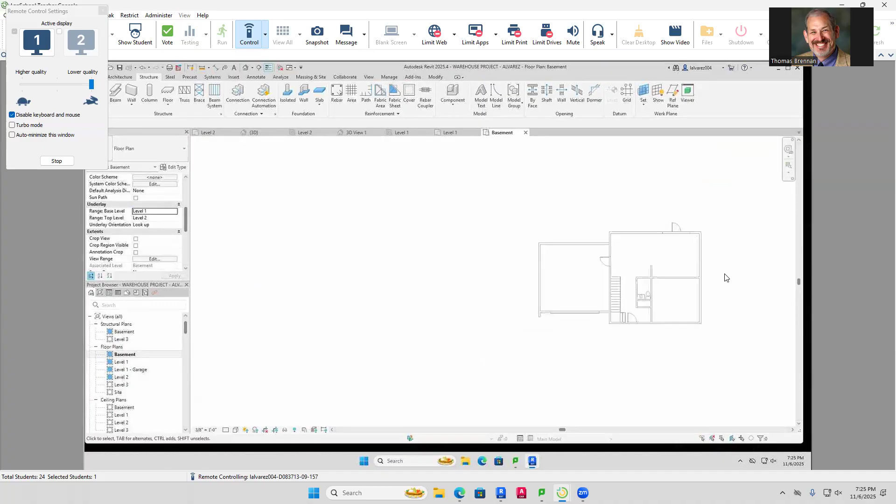Now what we do here, turn this on for a second. Okay, good. Now this is what you're going to do. I'll let go... all right, stop viewing, remote controlling. Okay, and I'll go back to here.

Now what you want to do is go to the architecture tab, go to your wall, select wall architectural, and change the type of wall to a generic 6.5. Then go ahead and click the outside edge and work your way around, clicking the corners of the outside of that structure. Am I doing the garage as well?

No, there's no basement on the garage. Okay, yeah, all right, good. Now press your escape key and take a look at it in 3D. The 3D view, which is the house. Okay, good. Now looks like what you get.

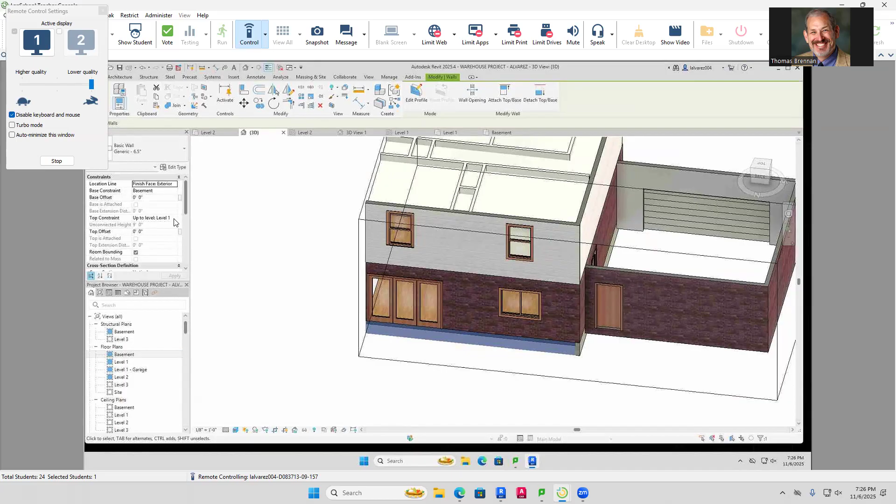Okay, click on the walls that are there. Let me jump in here for a second, it's too hard to describe. Let me go here, I'm not sure what's going on here. Yeah, that's right, that's right. Okay, looks like this got kind of flattened or something.

So yeah, we don't need this here. And then we have this, pull it down. There we go. All right, then this is what you do to get this in place. You're going to go ahead.

Now what you want to do is go to structure and go over here to wall, which is right there. Go ahead and do that, and you should be able to do it now. Go ahead and click on wall. Can you do that? I'm trying to, my control won't work. Okay, so let's go to view. What, do I still stay in 3D?

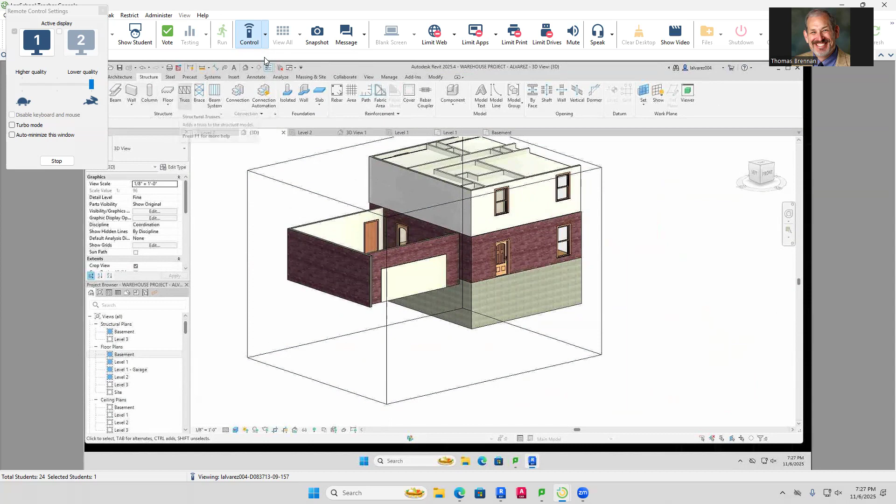Keep in 3D and just go ahead and use the isolated wall foundation and click on the edge like I showed you. Okay, I'll just watch what you're doing here. Okay, sorry. So isolated wall foundation, it's blue, can you see it there? Yeah, yeah, you don't want isolated - sorry, you want the wall foundation. I'm just reading off what was there.

And now click on the front edge of the basement. Click on it, good. Now rotate it, and you're going to do the other sides. Now somehow, okay, you can't see that because your section boxes keep me from seeing it. So what you have to do is you have to turn the section box off for sections. Okay, well let's do this.

Let me go here, and so what we're doing right here, let me do this for a second. All right. Oh, okay, all right. Somehow it's not letting me do that. Okay, and then we'll just go ahead and continue. You're here, and then you rotate around like this, and you do that. All right, that's how you do that.

All right, so that's in place right now. If you take a look underneath it, you got that kind of look. So now you got to put in your basement floor. To put in your basement floor, you just go to the basement level and do that, and keep on going. You're doing great. Okay. Yep.

And for the basement floors, am I going all the way out to the inside or the outside? Say that again, for the basement floor? Am I going to the outside or the inside? Interior wall, forget it, I got it. You got it, okay, great. All right.